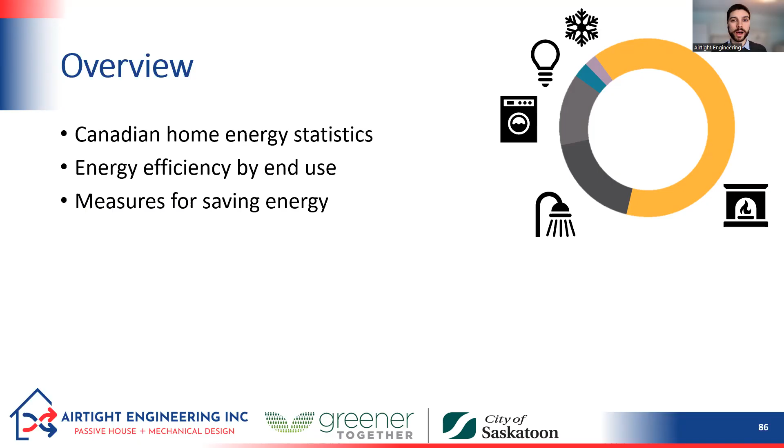So maybe you've heard a thing or two about these things called heat pumps. We'll take a bit of a deep dive on heat pumps for a few slides, talk about the Saskatchewan context. We'll look at HRVs in more detail, drain water heat recovery, cooling strategies, lots of things. So that you can both identify these in homes that your clients might be looking to buy or recommend them as paths to explore for your clients.

So first, looking at a Canadian context, how important is home energy efficiency? This is a pie chart of Canada's secondary energy use, and that's the energy that's used by end users, so all of us. And in 2018, it was 9,683 petajoules, which is a huge amount of energy. 1 petajoule is the energy use of 10,000 average Canadian households for an entire year. So 9,000 petajoules is a very large amount.

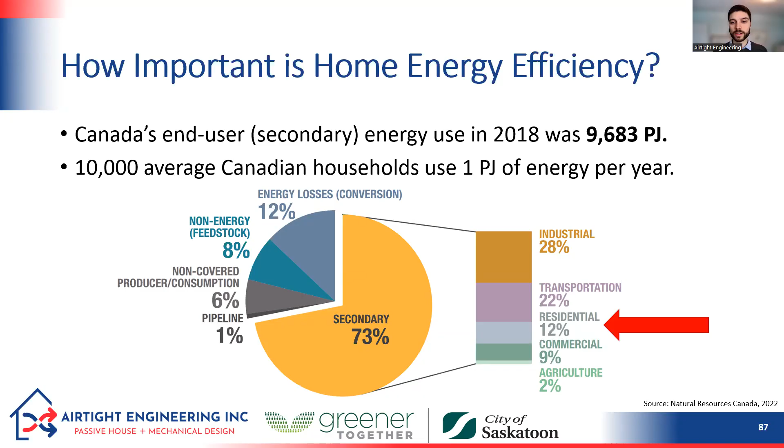And we can see here that of that secondary energy use, residential energy use makes up about 12%. So it's not as big as transportation, not as big as industrial use, but it's there in third place. It's a pretty big energy user. And when we're looking at a Canadian context of reducing our emissions, of stewarding our energy wisely, residential energy use is certainly on that priority list.

Interesting also to see what an impact energy efficiency in homes has had so far in Canada. In the close to 20-year period between the year 2000 and the year 2019, home energy efficiency improvements saved 440 petajoules of energy and about $8.5 billion of energy costs. That is a huge amount of energy savings just from efficiency. So that's LED light bulbs, more insulation, better windows, more air tightness, better appliances, all of those things.

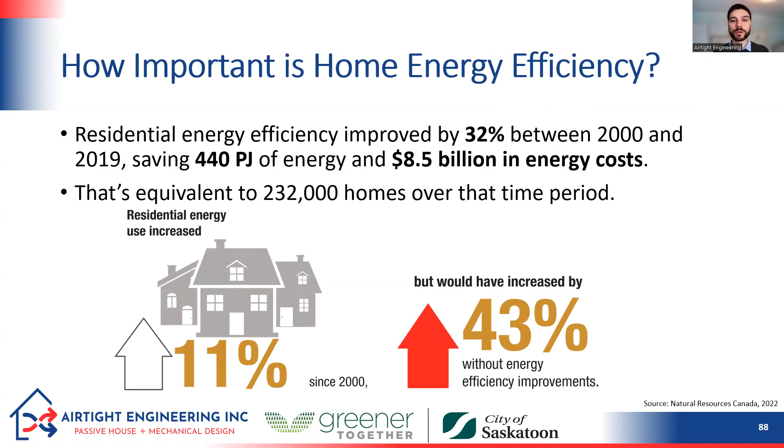So since 2000, residential energy use in Canada has increased by 11%, but it would have increased 43% if those energy efficiency improvements had not been made. So pretty impactful. In terms of cost, the average household spends $4,500 a year on energy, and this includes about $2,100 for residential energy expenses, which accounted for 6.6% of household spending on average.

Now, you might say, oh, 6.6% of household spending, not a huge amount, but let's also keep in mind that for lower income households, this would be a much larger percentage of their household spending. And also in areas where we're experiencing energy poverty in Canada. So if you've got remote northern communities where the only access they have is to electricity for heating or maybe diesel or wood even, that could be a huge burden that easily balloons to be much larger than that $4,500 a year.

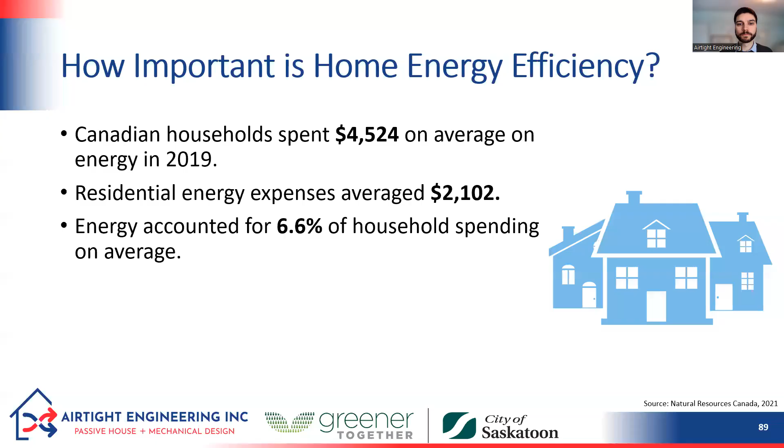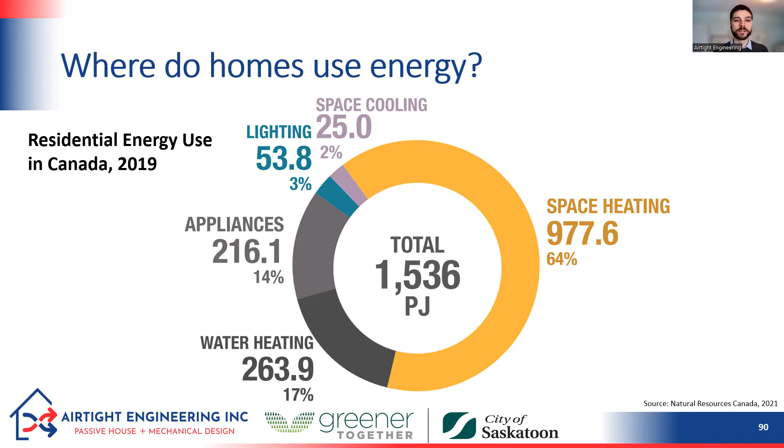So next, we could drill down into a home's energy use to ask, where is that energy going? It turns out that the vast majority of energy in our homes goes towards space heating. For the average home in Canada, 64% of our energy use went towards space heating. Next in line is water heating. Turns out that water takes a lot of energy to heat up, and so 17% of residential energy use on average goes towards water heating. Next, we've got appliances at 14%, and then lighting and space cooling are the smallest uses of energy at 3% and 2% respectively.

So for the next half an hour, 40 minutes or so, we'll talk through each of these different areas. We'll start with space heating, the largest energy use area, and then work on down the line. As we're talking about the different efficiency options that we can implement in a home, it's helpful to keep in mind the relative impact that each of those will have. So if I cut my cooling energy use in half, that's still only going to be 1% of my total energy use. Whereas if I cut my space heating energy use in half, that's a whopping 32% of my total energy use. So it is really helpful to keep these in mind as we're going through each section.

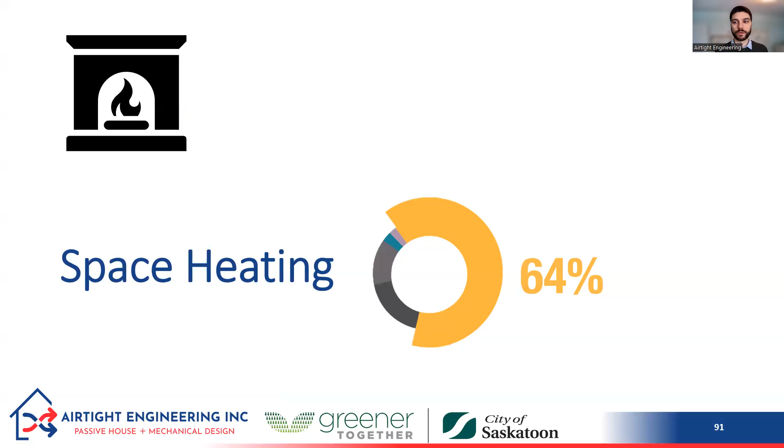So the first thing to talk about when we talk about heating is efficient building form. Now, as a real estate agent, you're helping people buy and sell houses, and often you don't get to choose the building form, but it can be a helpful consideration to point out to your clients.

So, if we have a simple building shape, it's going to have a lot less surface area that needs to be insulated and air sealed, and a lot less surface area that can lose heat and leak air, consequently, versus a complex building shape, which can actually just use a lot of energy just because of that complex shape, even if you've tried your best to insulate it well.

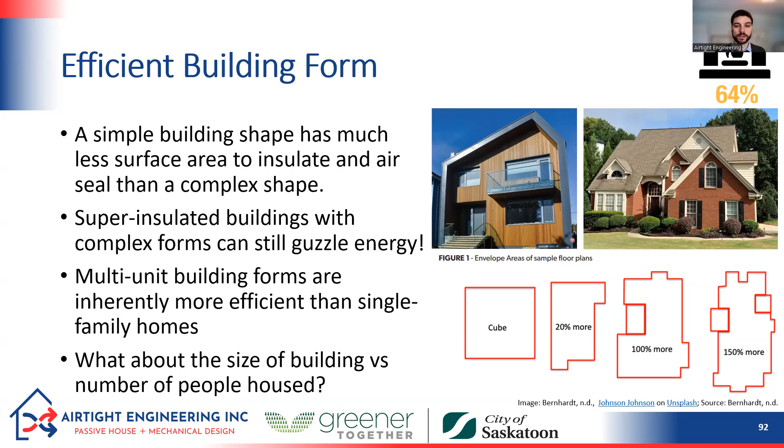So final question that I would ask is, what about the size of a building versus the number of people housed? This is an interesting efficiency question for us. If I have a building that's 10 or 15,000 square feet, it's a huge mansion and it's got two people in it, versus a building that is a more modest 2,000 square feet with two people in it. That's a big difference in terms of energy use, just because of the size of building that we're talking about.

So once we've looked at that sort of basic building form to understand how it might impact efficiency, we can look at a number of ways to reduce our heating energy use. And we always recommend following in line with sort of the passive house theory of the universe, which is very building science focused, to start with the envelope. So we start with making the envelope as efficient as we can, and then we move on to the mechanical system. And this has two reasons. Well, it has a number, but two that I'm going to highlight.

The first is envelope improvements last much longer than mechanical system improvements. You put in a high efficiency furnace, maybe it will last you 15 to 20 years, 25 if you're super lucky. If you put in more insulation, that will last the lifetime of the building, right? That could last 70, 50, maybe 100 years, depending on how well it's detailed.

So that's one reason. And another reason is improving that building envelope is going to really improve the comfort for our occupants, and also the kind of durability of that building, reduce the chance of mold growth, improve the thermal comfort. The walls are going to be warmer, the surfaces are going to feel warmer, be less drafty. So thinking back to our last module 3, when we were talking about the connection between energy efficiency and good building science. So let's start with that. And then after that, let's make sure we put in efficient mechanical equipment. So some of our options here, these 5, well, we've got 6 here.

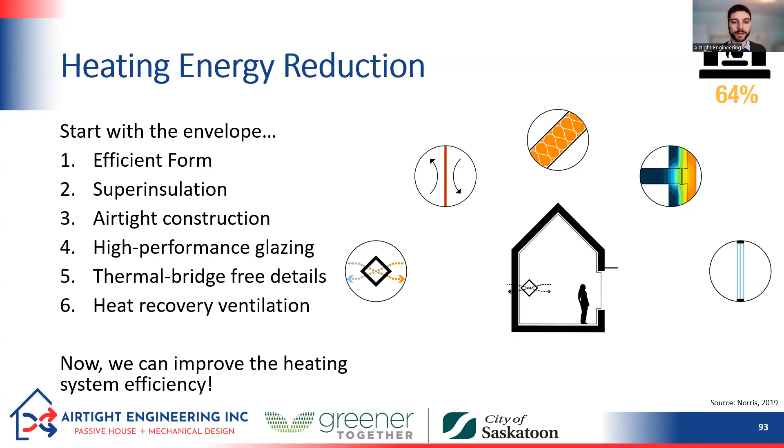First is the efficient form, but the following 5 are kind of the core principles of the passive house design strategy. So number 2 is insulation, super insulation. Number 3 is airtight construction. 4, high performance glazing. 5, we've got thermal bridge-free details. And then 6 is heat recovery ventilation. And now with number 6, we're starting to get into that mechanical system a little bit, but it's still a more passive kind of piece of mechanical equipment. So let's break into some of these in the next few slides.

Super insulation. This just means using a much higher level of insulation than is required by building codes in order to reduce our heating and cooling energy. So this might look like in Saskatchewan, R35 to 40 up to maybe R70 walls rather than the traditional R17 walls. So that's a substantial improvement in our amount of insulation. Got 2 main approaches when it comes to super insulation. One is affectionately known as stuff it, and the other is affectionately known as wrap it.

So on the top, we see a couple of examples of the stuff it strategy. So there's a double stud wall on the right. It's got 2 sets of studs. We're looking at a top view. And then the space between and the stud cavities is filled with blown in cellulose insulation. So that whole cavity is just full of insulation.

Some examples of wrap it on the bottom. We've got on the left, it looks like some sort of foam board insulation, and on the right, maybe a mineral wool insulation. And the structural wall is to the right, and all of the insulation is located outside of that structural wall. And then there might be some sort of screws or clips that are attaching all of that insulation back to the structural wall. So we're sort of wrapping insulation around the structural building.

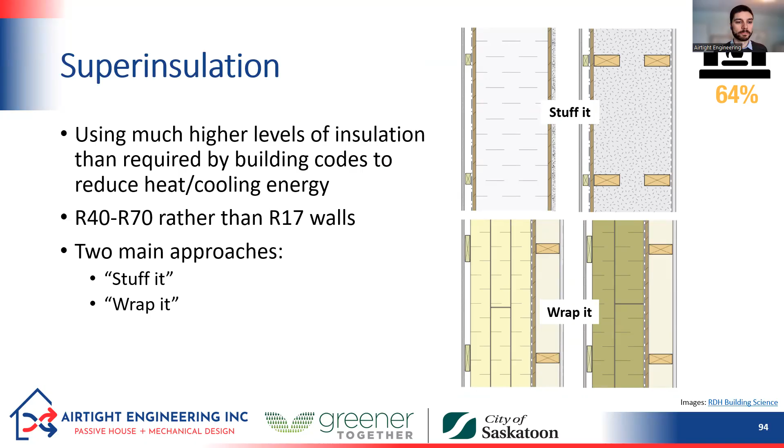Next, airtightness. We talked about this in the last module, but poor airtightness can lead to 30, I've heard even up to 40% of heating load on a drafty building. So that is quite the amount of heat loss just from air leakage. We measure air changes per hour at 50 pascals and use that as sort of a common metric for houses.

And just to give you a sense, poor airtightness, I would say, is anything over 3 air changes per hour at 50 pascals. Good airtightness is maybe 1.5, and excellent airtightness is less than 1. In Canada, the average for our housing stock is around 2.5. So if you have a newer house, probably it's a little better than that. And if you have an older house, it's certainly quite likely that it's worse than that.

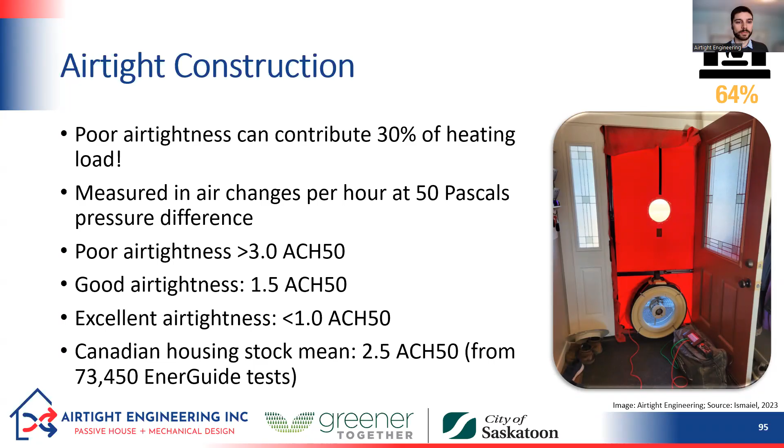High performance glazing. So now windows. So windows are important in particular because they're the weakest part of our building envelope. We're asking them to do a lot of things at once. We want them to be well insulated, like a wall, but we also want them to be transparent so we can see through them. And we want to be able to open them and close them. And so we're asking them to do quite a lot. And we need them to be watertight from wind-driven rain, etc. So they've got a lot of demands on them.

So just to dissect briefly what a high-performance window looks like. So we can certainly have sort of a scale or range within high-performance windows, all the way from a more standard triple pane PVC window that looks fairly normal, all the way up to the picture that I'm showing on the right there, which is a Passive House certified triple pane window. So this is in that range of the best money can buy in terms of efficient windows.

So that cutaway on the left, some of the attributes of a high performance window, it's going to have triple glazing. So in our climate, for sure, we would always recommend triple glazing. So 3 panes of glass with argon gas between them. So argon transmits less heat than air. And so that's a very important feature as well. We'll make sure that there are some low E or low emissivity coatings on that glazing. Sometimes just 1, ideally at least 2 coatings.

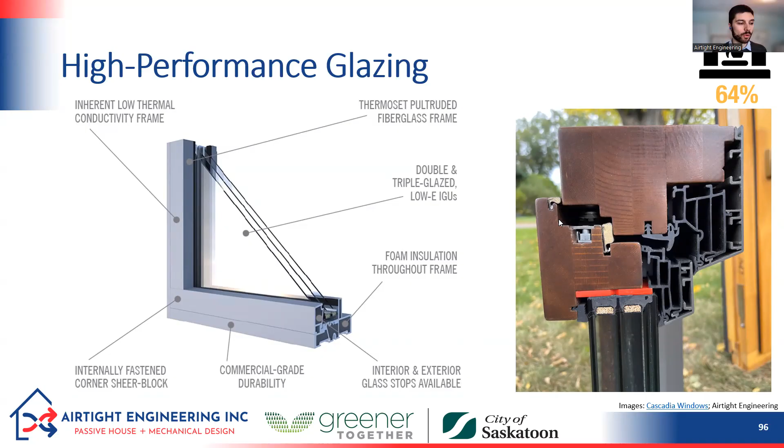And finally, we want them to be airtight. So standard windows often don't have the same airtightness as a well-made higher performance window. On this one right here, we can see it's got 1, 2, 3 gaskets. So there's 3 points of contact for it to remain airtight.

Thermal bridge free details. So we want to make sure that the insulation is continuous in our house. This is the idea of if you've got a winter jacket on, no one designs and sells a crop top winter jacket where you would have your midriff showing. That's because that would be a terrible thermal bridge and you would get very cold no matter how thick and poofy that jacket is. So same thing with our buildings. We want to make sure that that insulation extends all the way around in an unbroken kind of layer around our building.

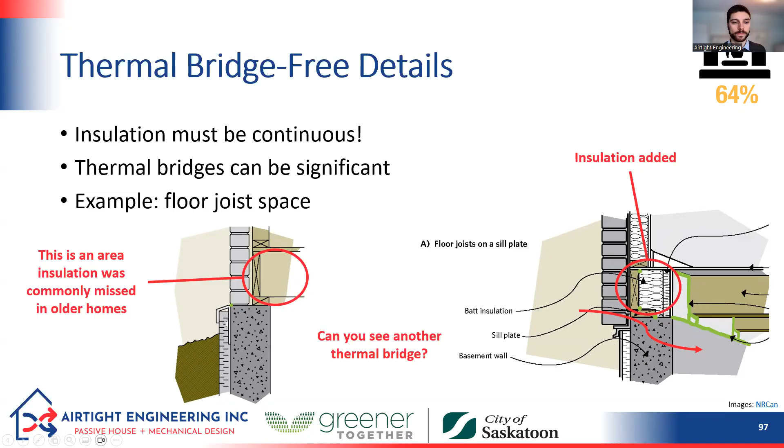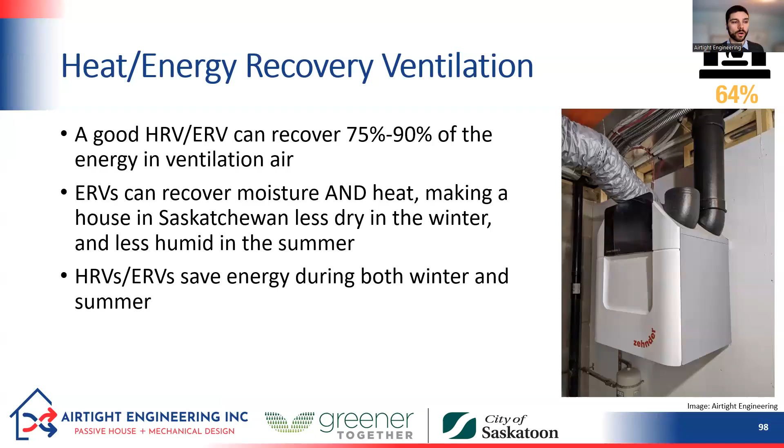So HRVs and ERVs are great additions. They are a necessary component of a high performance building, I would say, and are quickly becoming the norm just in general. Okay, so we've gone through all of those passive methods of saving energy. Now let's talk about our active heating system efficiency.

So here's just an example to give you a sense of the range of efficiencies we can see in different heating system types. So an old gas furnace would have a seasonal efficiency, which just means the efficiency on average over the whole heating season, between 55% and 80% efficient. Whereas a wood stove, if you've got a very efficient wood stove, it could get up to 80%. If you have a not efficient wood stove, maybe you're like 30% or 40 or 50%.

An efficient gas furnace or boiler is going to get in that 97% range, so 95 to 98.5, somewhere in there. Electric furnace or baseboards is 100% efficient. An air source heat pump, which we'll talk about more, is 200% efficient. And a ground source heat pump, so using heating from the ground, is going to be maybe 350 or 400% efficient, but for sure 300% in our climate.

So this begins to give you a bit of a sense of why people are so excited about heat pumps, because all of a sudden we get to break that 100% efficiency threshold that we've been bumping up against with our other heating systems. So I'll give a caveat and say that it seems like magic, but let's talk in the next couple slides a bit more about heat pumps and how we can actually get more than 100% efficient.

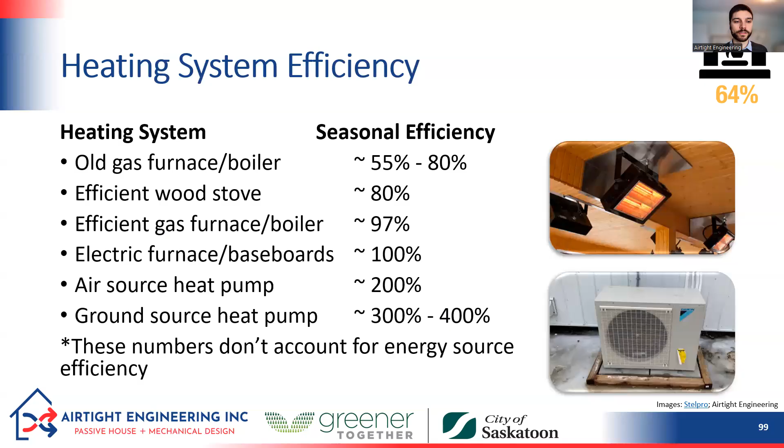So let's talk about heat pumps a little bit. This is very topical, and we added in a few slides because our first session that we did of this course, we were getting lots of questions. So we thought we would just add those in and give you some of the details.

So first of all, what is a heat pump? A heat pump is a device that moves heat from outside a house to inside and vice versa. It uses a fluid called a refrigerant. And so there's no air that's moving into the house or out of the house. It's actually using this fluid through some pipes between an outdoor unit and an indoor unit. We've got two main types of heat pump. The first is an air source heat pump, and the second is a ground source heat pump.

I will note that an air conditioner is a heat pump. It's just a heat pump that only works in one direction. So the difference between a heat pump that can both heat and cool and an air conditioner, which can just cool, is a reversing valve. It's one valve that allows the refrigerant to move the opposite direction, basically. And there's a few other details, some controls, a little bit more process, but essentially that's the difference. So if you have an air conditioner, you basically have a heat pump. It's just a somewhat limited heat pump because it can only cool as opposed to heat.

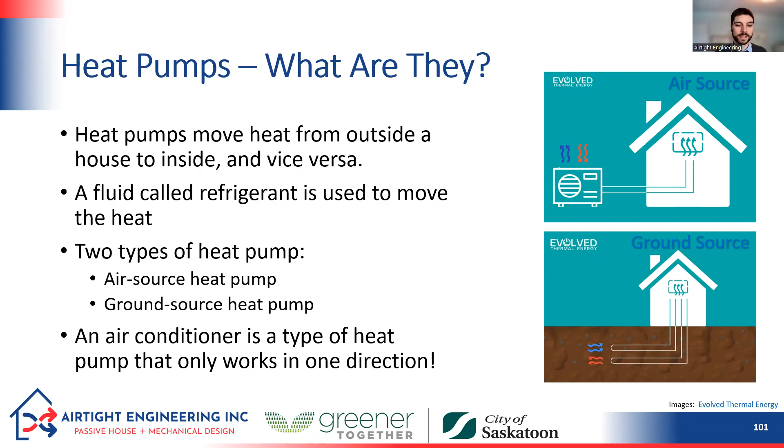So next question we get a lot is, do heat pumps work in Saskatchewan? And the answer is yes, a resounding yes. Ground source heat pumps, to start, work in just about any climate, unless you're in the far north with permafrost. The ground is a pretty stable temperature, and it's fairly warm. It's maybe 5 to 10 degrees, depending on how deep you go, maybe like 8 feet down. So it's quite warm, and we can actually get much more heat out of the ground than we can out of the air during the winter. And so ground source heat pumps have very little trouble working here.

And in terms of air source heat pumps, modern cold climate air source heat pumps that have been around for maybe the last 15 years or so, they're getting better and better all the time. And currently, many of them work down to minus 25, and some will work down to minus 30 Celsius. So, having said that, you do then need a source of backup heat here in Saskatchewan for those few days a year when it's lower than minus 30 outside.

But this can be an inefficient electric resistance heater if we want, because it's not going to be running very often. It's just going to run 1%, 2% of the year. And that heat pump is going to be producing the vast majority of our heat. So we can have some sort of backup heat. Could also be a natural gas furnace, right? Doesn't even have to be the most expensive, fanciest furnace.

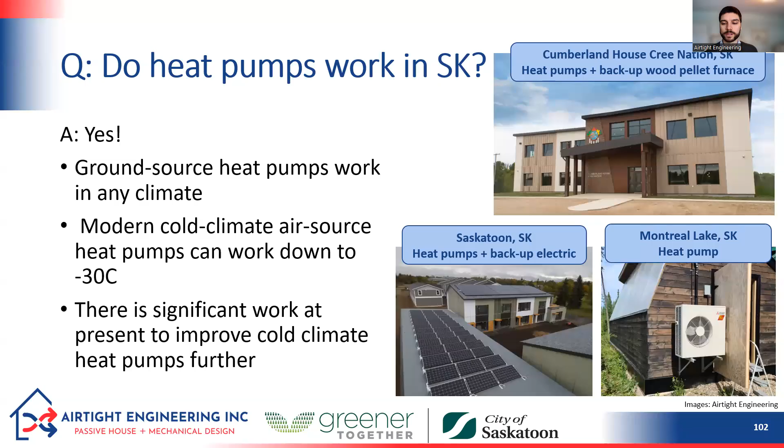And then that one on the right, Montreal Lake, this one is a greenhouse, and it's got an air source heat pump there, a Mitsubishi unit, which can run down to, I think, minus 25 or 30. And it's only run for kind of the shoulder season. So they would shut it down in the coldest couple of months. So they actually don't need a backup heater. They can use that heat pump as long as they want. And then in December, January, they'll just shut the greenhouse down because there's not much light up there anyways. And there you have it.

Another question that people have is, will an air source heat pump save money in Saskatchewan? The answer for this one is it depends. So currently, I did a little bit of analysis on this. This isn't a published study, but just analysis that we did in-house. If you've got an inefficient or a modern efficient house, right now, it's going to cost you more to heat with a heat pump than with natural gas. And part of that is because even though a heat pump is so efficient, natural gas is like 5, maybe 5.5 or 6 times cheaper than electricity at the moment. So it's really cheap. And that's the main thing it's got going for it in terms of being a heating fuel, in this comparison anyways.

So by 2030, if the carbon tax continues increasing as projected, we'll see a point where the modern efficient house is actually less costly to run with a heat pump than with natural gas. And in all cases, we see that our modern best-in-class house, today and also in the future, is going to be cheaper to just have a heat pump than to have natural gas for heat. When I talk about modern best-in-class, that's like that Radiance co-housing project. So that's sort of the passive house level of efficiency.

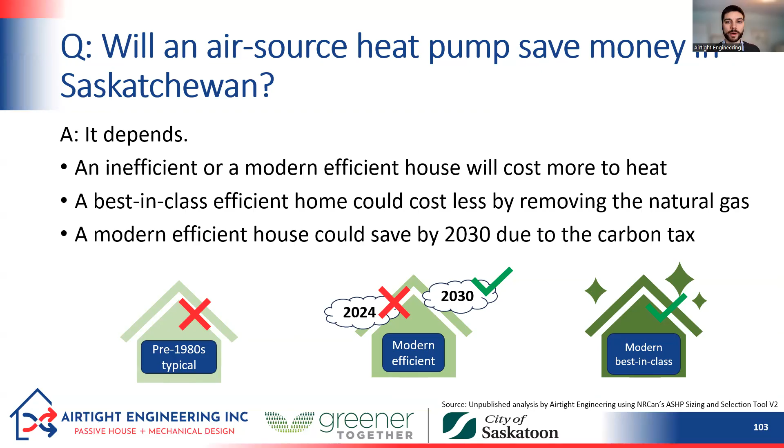So super efficient. And in both of those, the modern efficient and modern best-in-class houses, the reason that we're seeing savings with the heat pump is because we can get rid of the natural gas service and we don't have to pay the monthly service charge anymore. So if you're just looking at fuel prices, they come in really close, but then getting rid of the natural gas service tips the balance. So there we go. There's the slightly longer answer for whether an air source heat pump will save money.

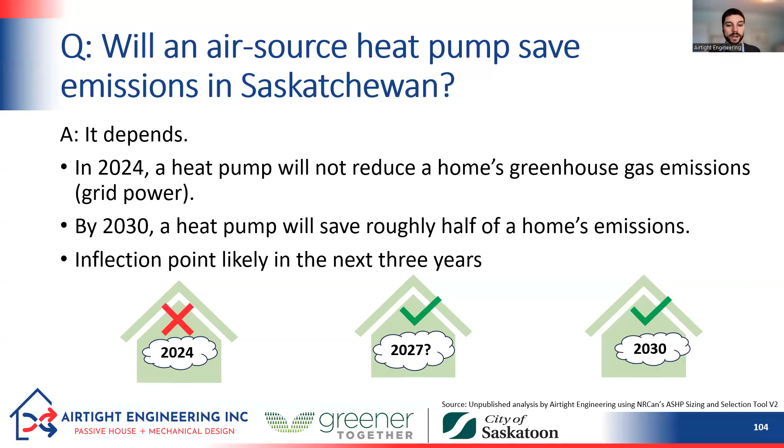And another question we get is, will an air source heat pump save greenhouse gas emissions? And the answer to this one is, again, it depends. So today, a heat pump will not actually reduce a home's greenhouse gas emissions if you're using grid power from SaskPower. And that's because our grid still has coal on it and it still has a lot of natural gas generation on it. By 2030, a heat pump will save roughly half of a home's heating emissions. So we're really close to that inflection point. And I've heard from some others that we're likely to hit that point in the next 3 years-ish. So maybe by 2027, we'll be hitting the point where it's actually environmentally better to run an air source heat pump than it is to run your natural gas furnace.

So a couple of key takeaways. Building efficiency makes the biggest difference. Notice that cost comparison. The heat pump was making less of a difference than having a really efficient building to how much it was going to cost to heat. So that's important. Also, cost and carbon, we're reaching that inflection point with both of them. So that point in Saskatchewan where a heat pump really starts to make sense, so in the next few years.

And because of that, it's important to think over the lifetime of our system when we're installing a new system in a house, instead of just thinking about, hey, what makes the most sense today? We have to recognize that that equipment's going to be installed for 15 to 25 years. So we want to say what's going to make sense 3, 5, 10 years from now as well.

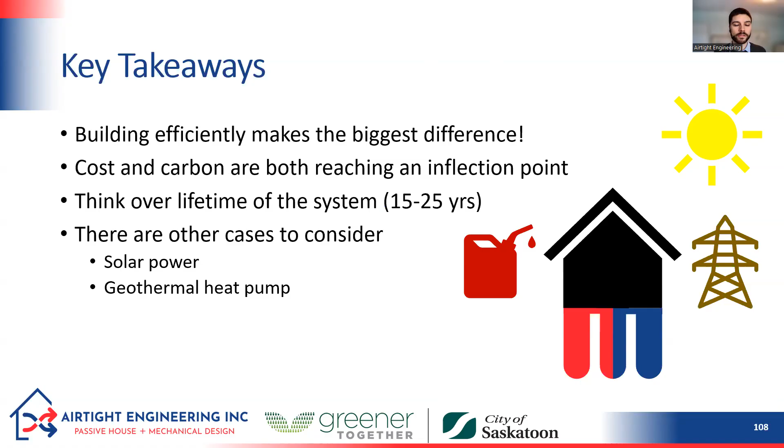We didn't consider the case of using solar power, and we didn't consider the case of a geothermal heat pump, which is even more efficient. And so a lot of the sort of things that apply to an air source heat pump were already there for a geothermal heat pump. All right, so that was sort of a brief deep dive into heat pumps, a little bit of what they do, some frequently asked questions, and there's certainly lots of information out there that you can look at to understand more.

And the last thing before we move on from heating is heating system controls. So you may have heard this before, but if you have a programmable thermostat or a smart thermostat, you can save energy. And the way that you do that, you don't just save energy just by having one. You have to set back your temperature by about maybe 4 degrees up to 6 degrees for an 8-hour period each day. If you do that, you can reduce your heating energy use by up to 10%. So that's pretty exciting. You don't have to set it back this much. It'll just mean less of a savings.

So in my household, during the day, we have our thermostat set to 20 degrees. And then at night, we set it back to, I think, 16.5 degrees. And so the house kind of cools off over the nighttime. We save some energy. Then in the morning, we have it set to kick back up before we wake up,

barely even notice. Just a note on this, this strategy does not work well if you're heating with a heat pump or if you have a boiler. So heat pumps are designed to just provide steady, continuous, low amount of heat. And so it's going to be more challenging and you're going to save less energy if you're asking them to kind of work less overnight, but then have to do a whole bunch of work first thing in the morning to try to actually get the house back up to temperature.

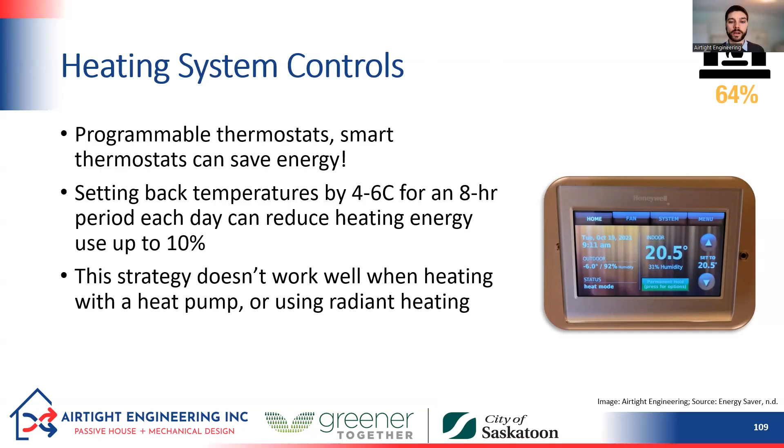Okay, let's talk about water heating. So this is our next biggest use of energy in a home. So when we talk about water heating, we're talking about domestic hot water, which is not the water used to heat a home in like a boiler or hydronic system. So we're talking about the water that comes out of the tap. Got a little donut chart here of the biggest sources of hot water use. Notice that the biggest ones are the direct occupant uses rather than our appliance uses. So the shower, the bath, the faucet, those are the biggest users of hot water.

And I find that kind of interesting. We can design our machines to be efficient, but it's much harder to design people to be efficient. So when it comes to hot water, our practices as individuals and our habits as consumers of hot water are actually really impactful.

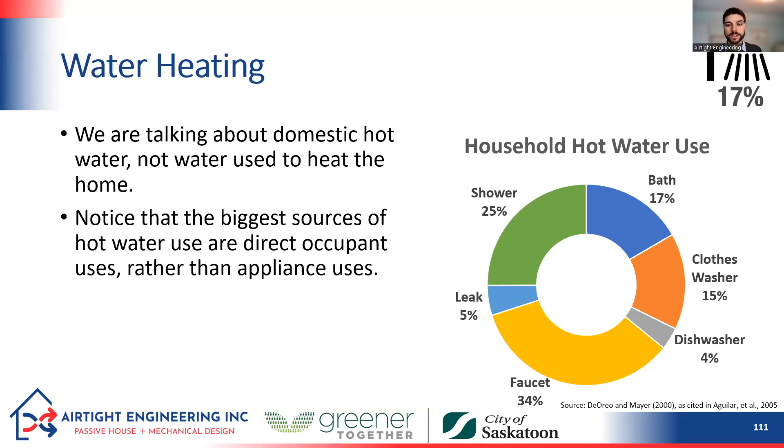A few ways to reduce hot water energy. One big one is using low flow fixtures. So if you have faucet aerators or fixtures that have a lower flow rate, even if you've got your tap turned on for 10 minutes while you wash dishes, I'm not sure who just leaves the tap running while they wash dishes, but if you do, then you're going to have a much lower flow of water through that tap and use less energy.

Using Energy Star appliances, great idea, super helpful as well. And using an efficient water heater can help a lot too. We'll talk about a drain water heat recovery pipe, what that is and what it does. Insulation, so if we can insulate our hot water pipes, especially if we have a recirculation system.

So we've got a bigger house and we've got piping and a little pump that recirculates hot water through the pipes to make sure there's always hot water on demand at the tap. We certainly want to have those insulated to reduce the amount of heat loss.

And as I mentioned, occupant habits are so important when it comes to water use. So education and trying to motivate occupants to save water is a big one. So I've just got a few little hot water saving tips there. Taking shorter showers, waiting for a full load to run a dishwasher or washing machine, washing clothes in cold water, turning off the water while washing dishes and brushing teeth. Those are all great, easy habits to form that go a long way to reducing our hot water energy use.

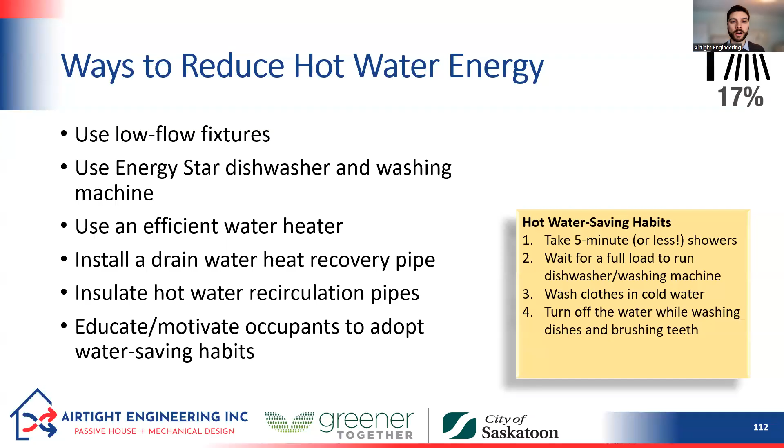So looking at water heater efficiency, similar to space heating efficiency, this UEF, uniform energy factor, you can just think of it like the seasonal efficiency a few slides back. So 0.57 would be 57% efficient, 0.9 would roughly equate to 90% efficient, etc. So on the low end there, we've got a natural gas tank water heater. It's going to be in that 57 to 90% efficient range. A natural gas tankless water heater is going to be 80 to 96% efficient. Moving to electric tank, 90 to 95% efficient, and electric tankless, 99 to 100% efficient.

And the reason tankless is more efficient is because there's no standby losses when that hot water is just sitting in the tank, slowly cooling off. I will note with tankless, it's a bigger instantaneous draw in terms of the energy or natural gas it requires. And so that is sometimes a consideration. You might not have space on the panel in your house if it wasn't initially designed with an electric tankless in mind, for example. Sometimes for natural gas, you actually have to size up your natural gas piping in your house as well.

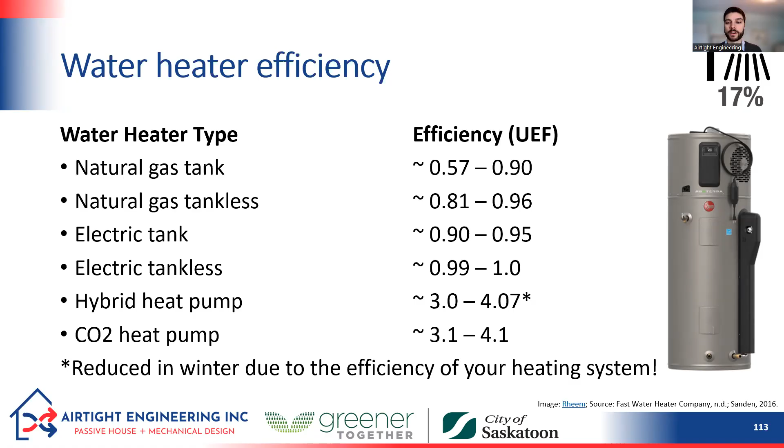So a caveat on the hybrid heat pump option is that even if we have an efficient space heating system, let's say we've got a natural gas furnace that's 97% efficient, and we've got this hybrid heat pump that's 300% efficient. Well, it's taking heat from the mechanical room, and that heat is being replaced by the furnace. So it turns out during the winter, overall, that water heater is only 97% efficient, right? Because it's limited by the efficiency of our space heat. So it can make sense to have a heat pump in both scenarios, both to heat our space and also to heat our water.

Drain water heat recovery. This is a great technology. It's super simple, no moving parts. It'll last as long as the rest of your plumbing system. It's essentially some copper pipe wound around a copper drain pipe. This is a technology that we actually did some pioneering work on in Canada, and we've got some really good local manufacturing. There's a company in Saskatchewan. Actually, I think they did just end up selling to a company out of Quebec. But this is one of the few energy efficiency technologies that we export to Europe. Go figure. So we do a lot of this in Canada, which is great.

So what this does is it uses warm drain water to preheat the water that goes into our water heater so that the water heater has to work less hard. And it can also be used to preheat the water that goes directly to the shower tap as well, so that you need less hot water at the shower tap too. So with one of these units, you can save 25 to 70% of the hot water from a shower. So pretty exciting. One caveat is it doesn't work for a bath because it only works when water is flowing into the hot water tank at the same time as water is flowing down the drain. So it works for a shower, doesn't work so well for a bath.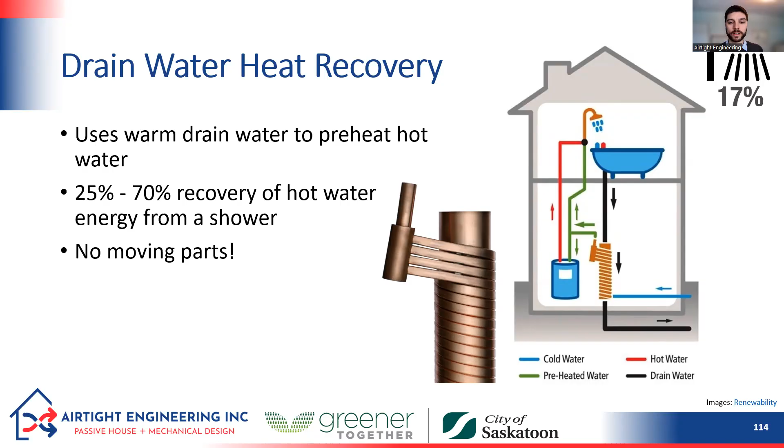But it will work with instantaneous hot water heaters too, any type of water heater. So this is a great option, and it's pretty cheap. Usually, I think it's maybe like $800 to $1,000 installed cost, and it will save that amount of money on your hot water likely in a few years, depending on how efficient your water heater is and how many people are using it.

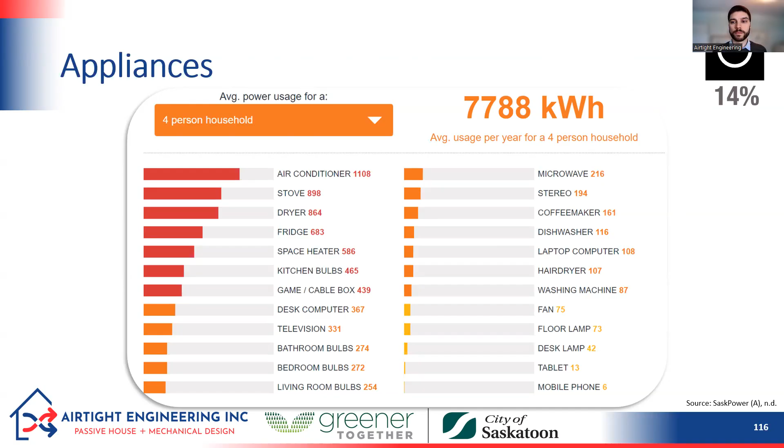Some of our ways to reduce our appliance energy use. The first thing we can do is just doing without unneeded appliances. I find personally, because our electronic gadgets and appliances are so easy to use, sometimes I can get lazy and just use them even when I don't need to. It's just too tempting. It's the click of a button and whatever I want at my fingertips without thinking of the energy impact that that's having.

We can use Energy Star appliances. So Energy Star is a great program out of the States that Canada uses as well. And it really helps push the envelope in terms of appliance efficiency. And so if you get something that's certified Energy Star, you know that it's going to be more efficient than just the average appliance that isn't certified.

Something else we could do, we could use smart timers, smart plugs, or power bars. So this is something that you could do for, let's say you've got a big computer setup with speakers and all the rest. If you've got a smart power bar that's got an on-off switch, you can make sure that it's not drawing any phantom power when you aren't using it. So that's something that I use on my computer, and I try and remember to just turn off the power bar at the end of the day and then turn it back on the next morning.

And again, this is really one of those user-focused areas. Appliances, it's like high touch, high interaction with our building occupants. And so all of the work that we can do to educate and motivate efficient habits in terms of gadget use is certainly helpful.

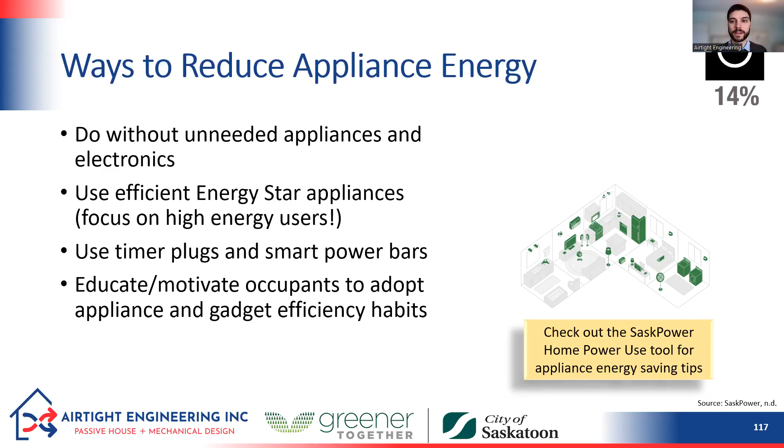I'll just highlight a couple of efficient appliance options in that sort of top 5 area. First is dryers. A cool technology is a condensing or a ventless dryer. So some of these would use technology of a heat pump. Some of them just use condensing technology similar to a dehumidifier. So they have no vent to the outside, and they don't heat in the same way anymore. You generate a bit of heat, but what they're doing is they just have a little dehumidifier inside the dryer, and it's just dehumidifying your clothes as opposed to heating them until they dry.

So these can use, I've heard, maybe half the energy of sort of a standard vented electric dryer. So these are a great option. They do take a little bit longer, however. So that's something to note. If you're doing dryer load after dryer load all the time, maybe you've got 27 kids in cloth diapers, maybe it's not for you. But for many of us, a ventless dryer is a great option.

Cooking is another big one. Induction stoves, so electric induction stove tops are quite efficient. And also we've got a lot of great options now for cooking with smaller appliances. So something like a microwave is a lot more efficient for heating up a small amount of food than a stove or an oven.

Also, Instant Pots. At first, I was a little bit skeptical, seemed like a fad, but learning more about how efficient they are, their efficiency, I'm a nerd, won me over. And they're so efficient because you don't lose all the heat to steam. So if you're boiling a pot on the stove, so much heat is escaping in the form of steam. Same thing with if you're using like a crock pot, got a lot of energy loss to that steam, whereas an Instant Pot keeps all of that steam inside and uses it to cook. So it uses very little energy to cook something.

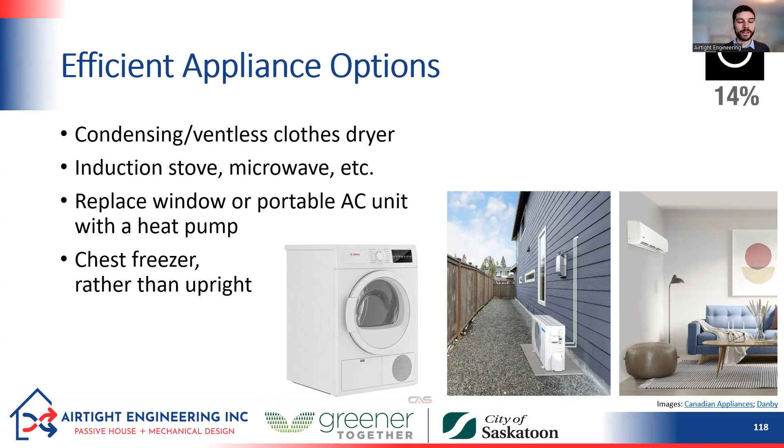And just an interesting note, if you've got a deep freeze, a chest freezer is actually much more efficient than an upright freezer. And that's because every time you open an upright freezer, all of the cold air falls out onto your feet. And in a chest freezer, because of its shape, the cold air stays in when you open it. So just a fun note there for another appliance efficiency tip.

Now we're getting to our second last section. So lighting, coming in at 3%. Probably most of you have already jumped on the bandwagon of LED lighting, but if you haven't yet, I would highly encourage you to consider switching your light bulbs to LEDs and encouraging your clients to do the same. These are easy wins. LED bulbs are like 6 times more efficient than an incandescent bulb, and they last 10 times longer. So it's pretty tough to beat that.

Yes, they're a bit more expensive, but when you look at the lifetime operating cost, they are way cheaper. They're an easy win. They pay out so fast in terms of your investment. So this is certainly one to encourage. So this little graphic is from SaskPower, and this is the savings on, I think, 10 bulbs over a period of 15 years. And we can see that our LEDs are saving us almost $2,000 over that course of 15 years. We don't have to replace them. They last 10 times longer than the incandescent, and they use way less energy.

I have found in my own household, we've gotten some of the slightly fancier, are they the G9 or something bulbs that have the 2 little prongs on the end. One manufacturer has lasted really well. The other manufacturer has certainly not lasted 10 years, but I'm assuming that that technology is improving all the time on some of those more niche or fancier bulbs.

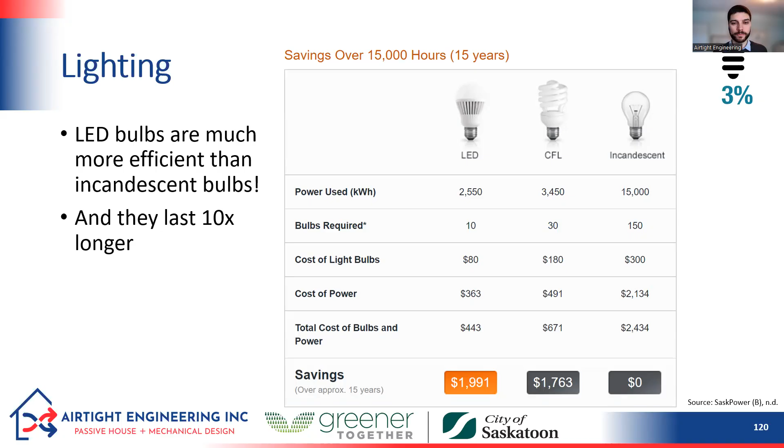A couple other ways to reduce lighting energy. So we talked about switching to LED bulbs, turning off lights when not in use. You can get some great, fairly inexpensive LED fixtures that are motion activated now. I have one of these in my workshop and my laundry room. I just walk into the laundry room, the light turns on, 2 minutes later, it turns off on its own. It's great. I never forget the lights on. Using localized task lighting can be a great option as well. So having a lamp in a room as opposed to turning all of the lights on in the room if we're just sitting in the corner reading.

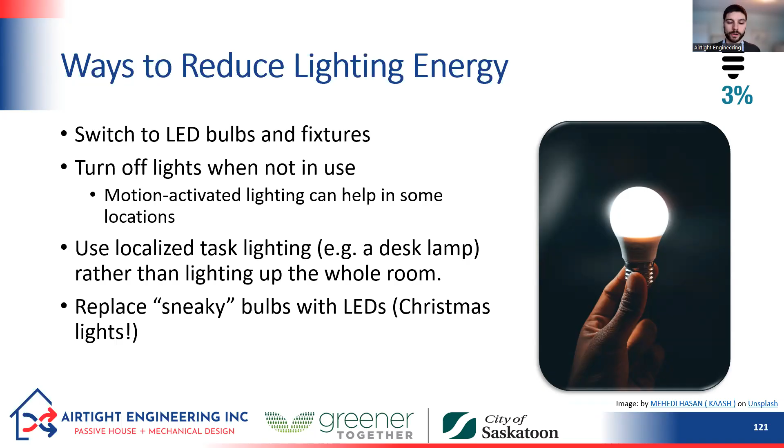And then also sneaky bulbs. So sometimes we've got all these LEDs in our house, and then our whole yard is decked out with the old incandescent Christmas bulbs from like 20 years ago, and we're just burning through the energy, keeping those lit all year. So getting some LED Christmas lights can also be a great idea.

Our last section to talk about is space cooling. So in the summer, heat enters the house through a number of ways. So the walls, the roof, and also as air leakage. We also get the sun shining in. That's going to bring heat into the house, and we're going to have our occupants generating heat as well. So whether it's the people or the pets, the appliances they're using, that's generating heat too.

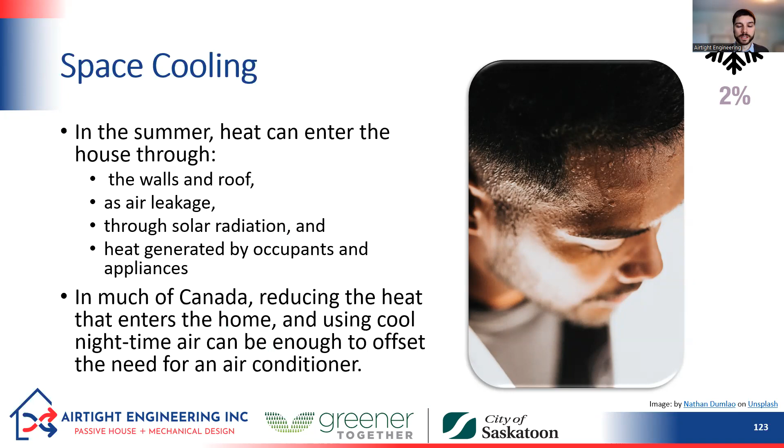Traditionally, in much of Canada, we could reduce the heat entering the home and just use nighttime air to offset the need for air conditioning. We maybe didn't even need an air conditioner, but that's certainly changing with the changing climate. And if you're in a big city that doesn't have cool nighttime air, maybe it's a bit of a heat island, there's lots of concrete, you might need an air conditioner and not be able to just cool with the nighttime air.

Some of our strategies for reducing our cooling energy: we can reduce the heat gain through the building envelope. We can reduce our ventilation heat gain or solar or internal heat gains. Those should look very familiar. And I even put the same picture as our heating energy reduction strategy because they're the same thing. So we can do a lot of the same things for cooling that we did with heating. I'll talk about just a couple in particular.

The main one I'll talk about is reducing solar gains, but this idea of a nighttime air flush is something we can do as well. This is something that I do in my house. I don't have air conditioning. And so at night, I wait until it's cool enough outside.

Then I open all my windows and I have a fan pointing out of one window in the same direction that the wind is blowing. Then I just run that fan overnight. And then the next morning, I close all the windows and turn off the fan. And usually I can drop the temperature in my house maybe 3 to 5 degrees, depending on how cool it is at night, just by doing that.

And it's a great way to reduce the cooling energy that I would need. And in my case, I don't have an air conditioner, so c'est la vie. And then finally, we can certainly use an efficient air conditioner. So if we're going to have an air conditioner, let's make sure it's efficient. And why not make it a heat pump? Then we get the option of doing a bit of heating with it as well.

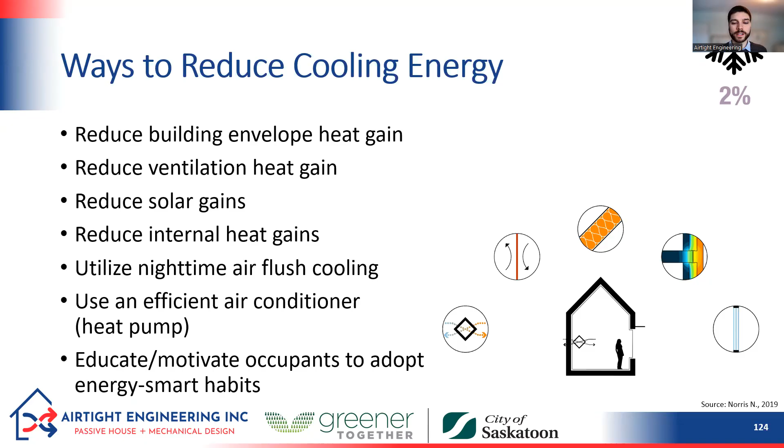Finally, education, right? So we can also educate our occupants to adopt some energy smart habits, whether that is that nighttime flush of cool air or other options to just reduce the cooling that we're requiring from, say, an air conditioner.

So this idea of reducing solar gains, or the heat that the sun brings into our house, can be quite substantial depending on how many windows we have and the orientation. So here's a couple options. The first is we can use low solar heat gain windows. So windows with thicker low E coatings on the east, west, and north side, because those are the windows that are really going to bring a lot of heat in.

And on our south windows, like this top picture here, we can have some sort of shades or awnings over top of the windows. And what this will do is allow the low winter sun, which is coming around our house at a low angle to the south in the winter, in to bring in some nice heat and sunshine when we want it to, but it'll prevent that high summer sun from getting in the window. And so that's going to prevent some of that overheating from the sun.

Something else that we can do too is we can use exterior blinds. This is something that's not common in North America yet, but is super common in Europe and other parts of the world. We use interior blinds here, and it turns out that having the blind inside the window does very little to stop the heat from coming into the house because the heat has really already made it inside the house by the time it hits the blind, whereas an exterior blind is going to let very little of that heat from the sun through.

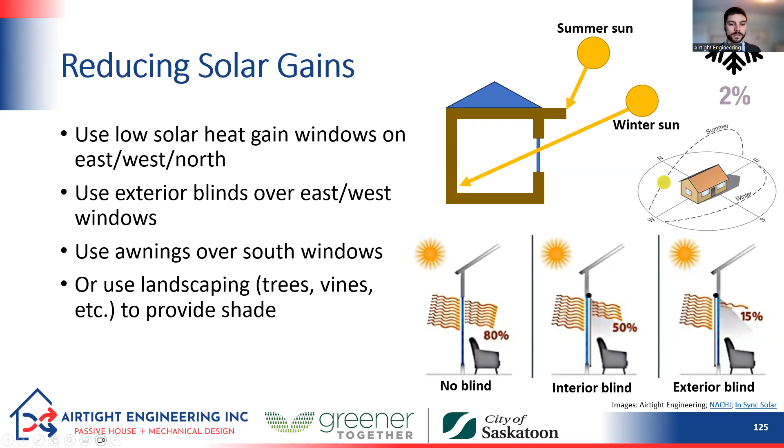So this says it's letting 50% of the heat in. I've heard more like, I don't know, maybe more like 80% of the heat in. But in any case, if we can put some blinds outside, that's going to make it even better in terms of preventing solar energy from coming in.

Okay, so that's the end of cooling. So just to summarize, we've got to the end of our energy efficiency for home strategies. So in summary, the main areas of energy use in our house, we've got heating, domestic hot water, appliances, lighting, and cooling. And the two big ones are heating and hot water. So if we can really focus on those to start, that's going to go a long way to reducing our energy use in our homes.

And we saw as well that energy efficiency can be improved through a few different ways. So through upgrades for sure, through retrofits, through purchasing new appliances, also just through maintenance, caring for things, making sure they're working properly, and through resident habits. As we mentioned, the people inside the house have a really big impact on how much energy that house uses due to their habits. So if we can help educate people as well, that's going to go a long way to improving our home energy efficiency.